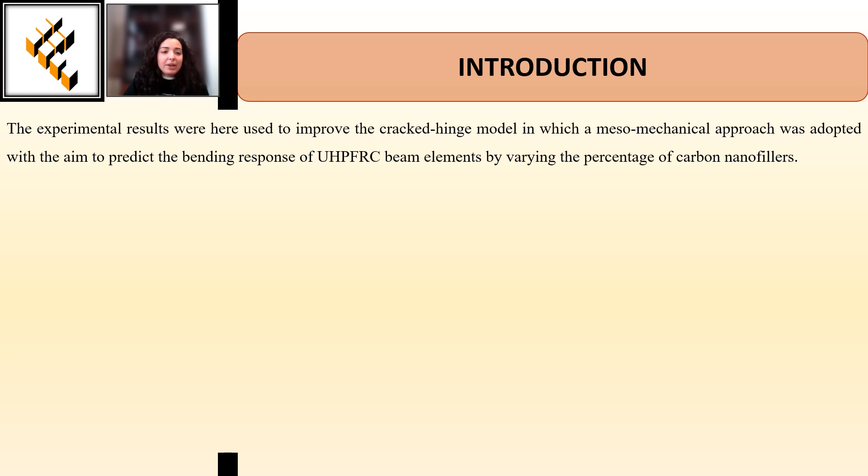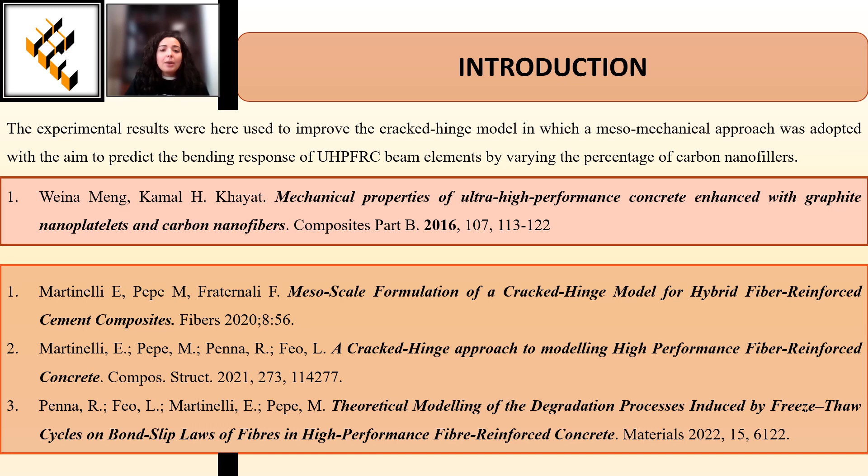First of all, the experimental results were those presented in this work by Meng and Khayat, and were used here to improve the Cracked-Hinge model already developed in this work, in which a mesomechanical approach was adopted. The aim is to predict the response of ultra-high performance fiber reinforced concrete beam elements by varying the percentage of carbon nanofiller.

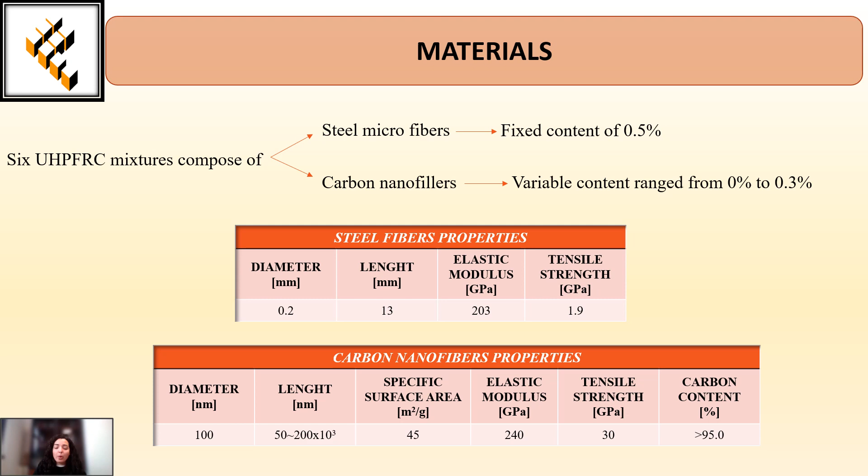As regards the material, six mixtures composed of steel microfibers with a fixed content of 0.5% and carbon nanofillers with a variable content ranging from 0 to 0.3% were considered.

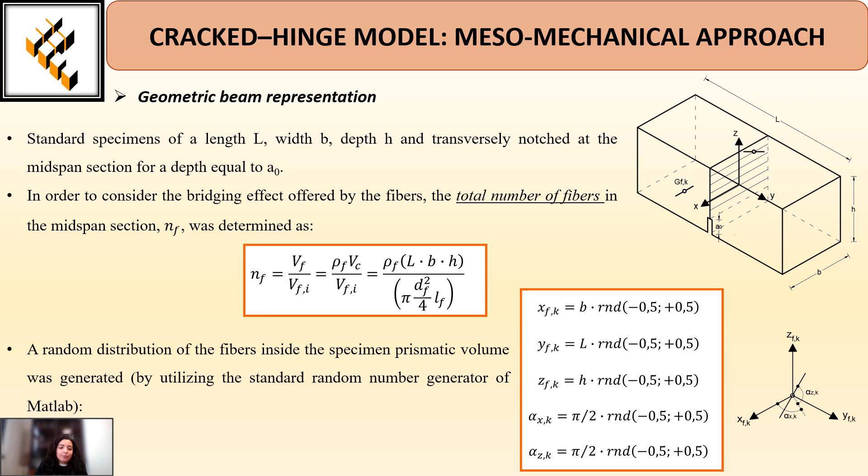For the geometric beam representation, a standard specimen transversely notched at the mid-span section was considered. The model is able to consider the bridging effect offered by the fibers, so the total number of fibers in the mid-span section was determined as the ratio between the volume of the total fibers and the volume of the single fiber. A random distribution of the fibers inside the specimen's prismatic volume was generated by utilizing the standard random number generator in MATLAB.

As regards the model, the principle of the kinematics is inspired by the so-called Cracked-Hinge approach, based on the following assumptions. First, the flexibility was distributed only in the center part of the specimen, while a rigid body behavior is exhibited by the remaining end parts.

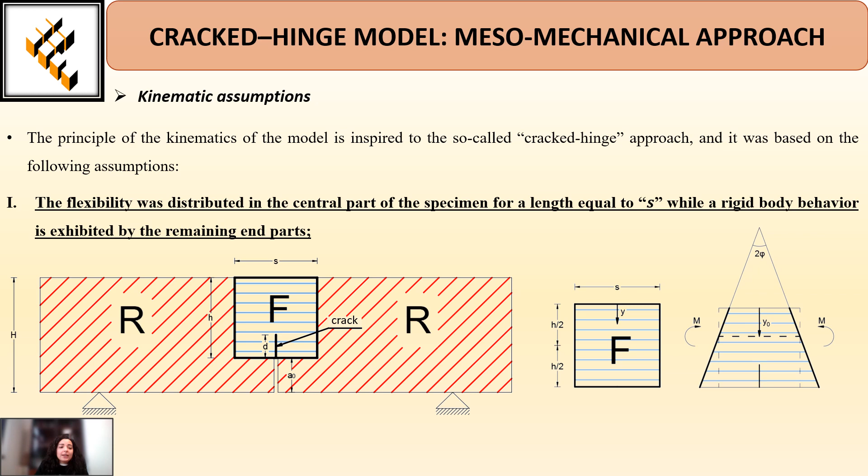Then, if we discretize the mid-span section into NC layers, we can evaluate the average axial strain of the Kth layer before crack formation and the crack opening displacement after crack formation. This means the average value of the axial stress of the concrete at the Kth strip can be determined as a function of the axial deformation before cracking, or as a function of the crack opening displacement after cracking.

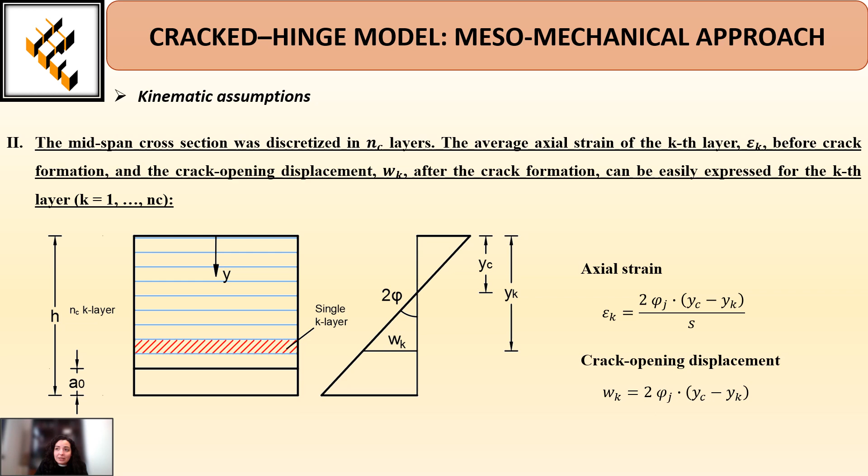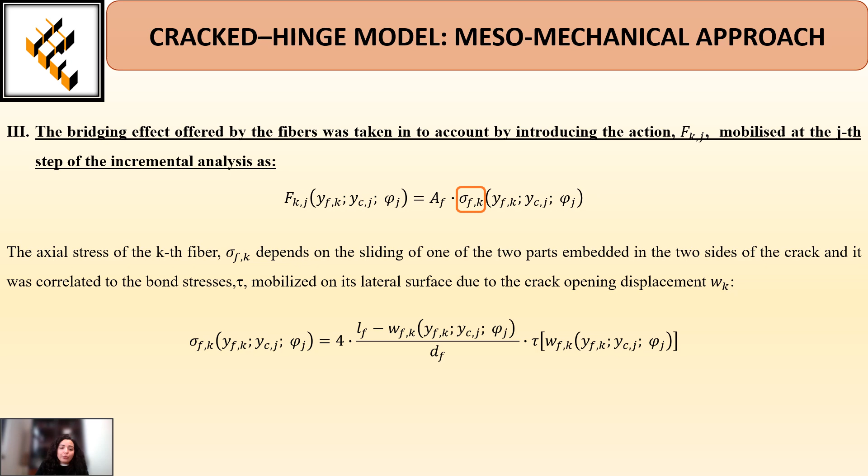As regards the fibers, the bridging effect offered by the fibers was taken into account by introducing the action Fk mobilized at the Jth step of the incremental analysis as the product between the fiber's area and the axial stress that depends on the sliding of the two parts embedded on the two sides of the crack, correlated to the bond stresses but also to the crack opening displacement.

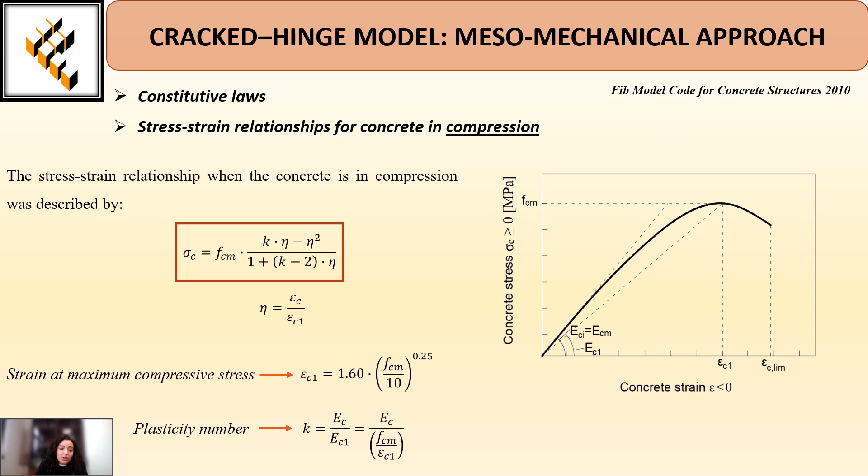For the constitutive law, we refer to the Fib model code for concrete structures. The concrete behavior in compression is described by this equation, related to the strain at the maximum compressive stress and the plasticity number.

To describe the tensile behavior, a stress-strain diagram should be used for the uncracked concrete, and a stress crack opening diagram, as shown in this second figure, should be used for the cracked section.

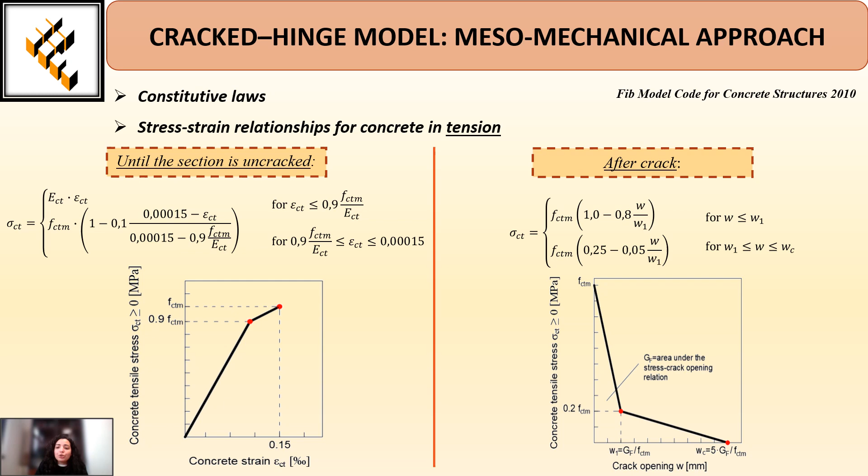As regards the constitutive law for the short steel fibers, the mathematical relation of the local constitutive law adopted in this study is provided in this equation, where S was considered equal to the crack opening displacement at the level of the Kth fiber, while the 5 unknown parameters have to be calibrated using the experimental data.

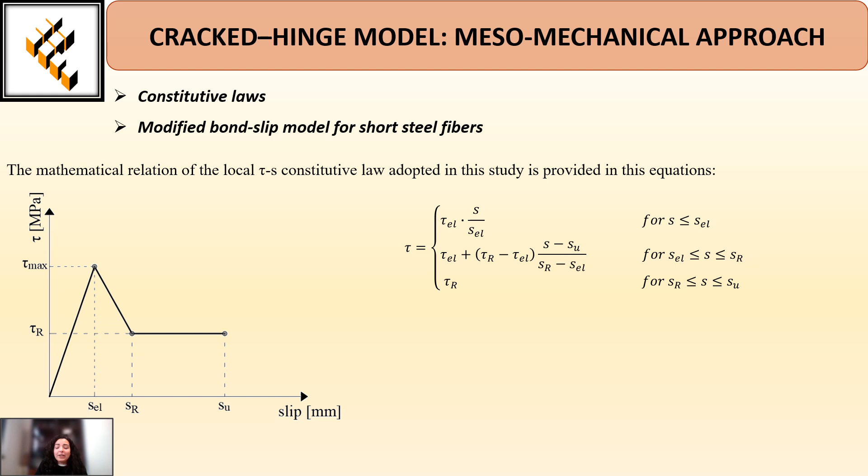The nonlinear bond-slip law is divided into 3 different branches: a linear elastic behavior at the stress level corresponding to the matrix tensile strength, a softening behavior characterized by the formation of many microcracks in the mixture, and a constant behavior.

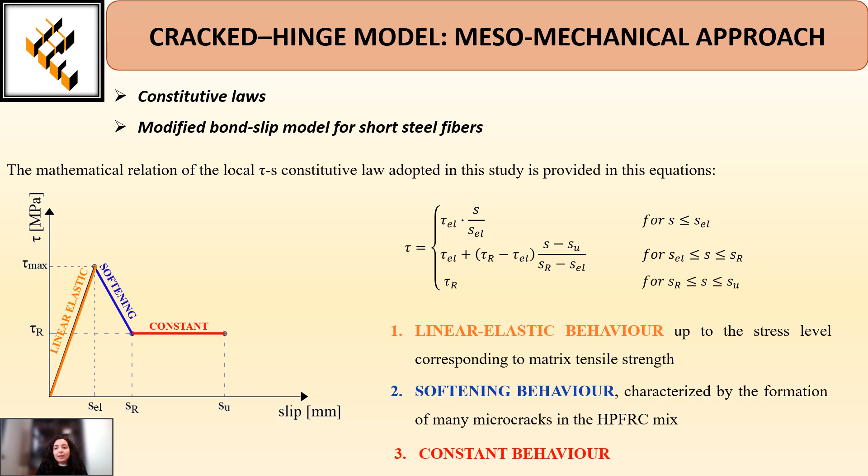For the calibration, an inverse identification procedure was carried out with the aim to determine the value of the model parameters that lead to minimizing the difference between the measured and predicted force displacement curves.

The increase in the fracture energy with the increase in the percentage of nanofiller was taken into account by modifying not only the crack opening W1 through the alpha parameters, but also the fracture energy through the initial fracture energy and the initial compressive strength.

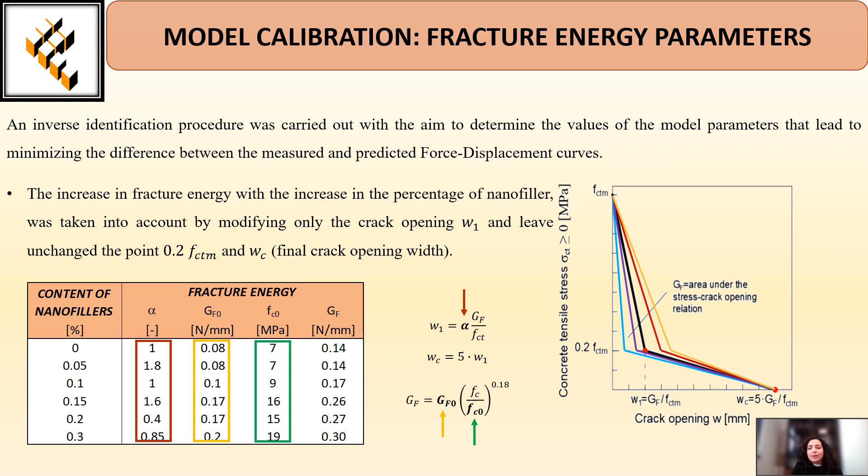For the calibration of the bond-slip law parameters, first 5 parameters were calibrated for the specimen without nanofiller, and then the 2 bond stresses were calibrated again for reinforced specimens, while all the other parameters were considered constant. Here it's possible to see better the initial branches.

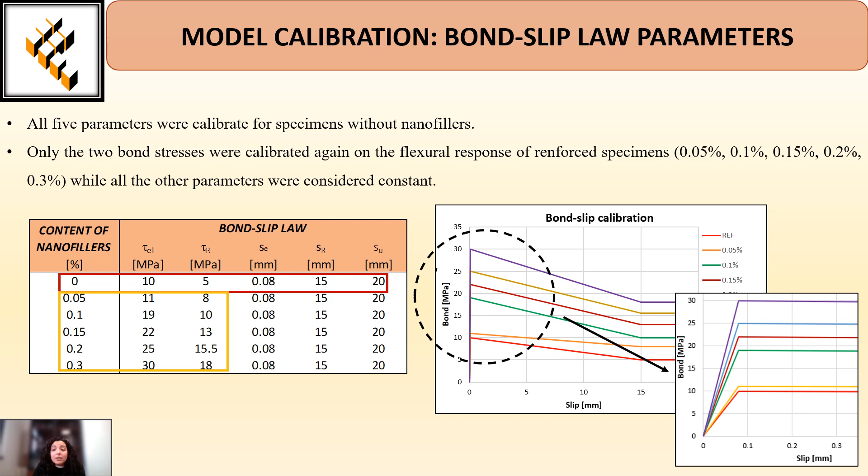In this slide are presented the results, so the comparison between the numerical load deflection curves, which are the colored ones, and the experimental curves, which are the black ones. We can see that the curves match almost perfectly in the first part, while some differences are presented in the post-crack behavior.

A softening behavior is exhibited for low content of nanofillers, and a hardening behavior is observed when the content is higher than 0.1%.

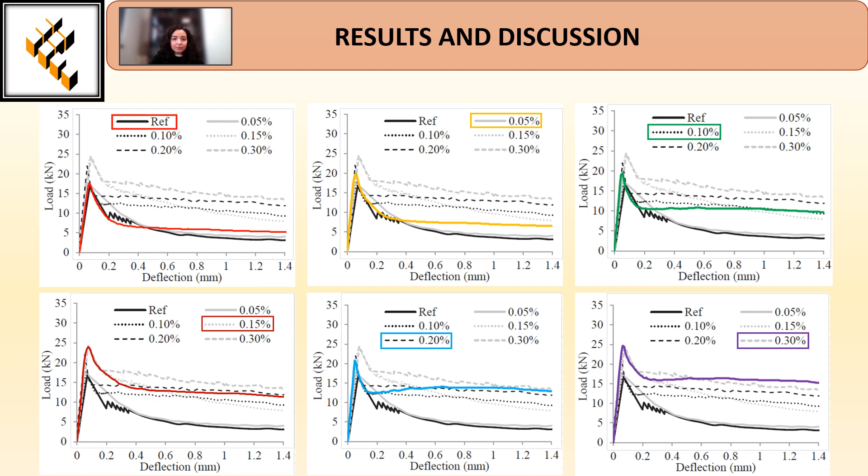It can be noted that the correlation of the stress-strain behavior in terms of fracture energy results in an almost linear correlation with the increase in nanofiller content.

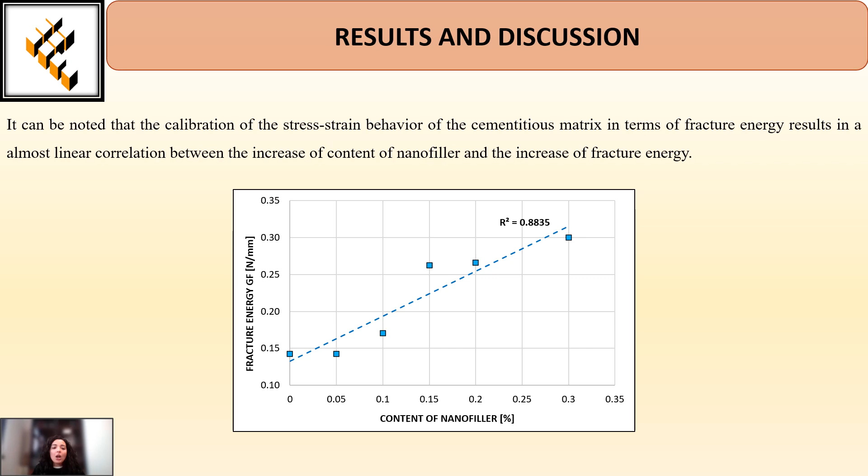At the same time, the back analysis of the bond interaction between the cementitious matrix and the steel fiber shows that the increase of nanofiller dosage is linearly correlated to the increment of bond stresses.

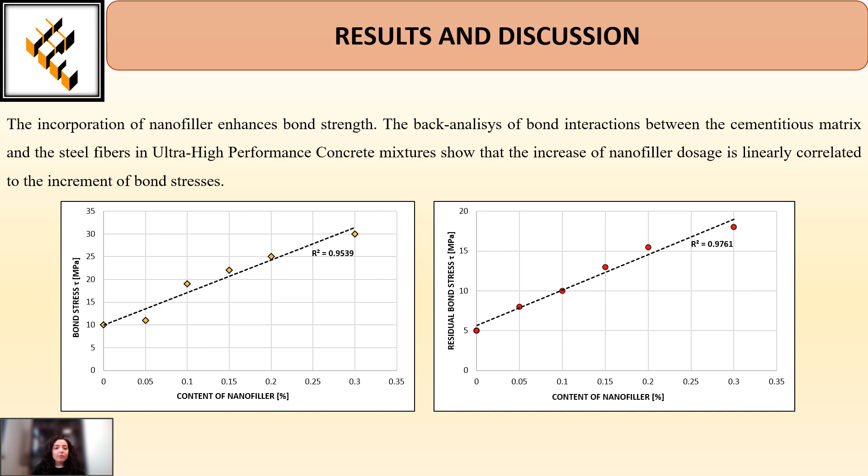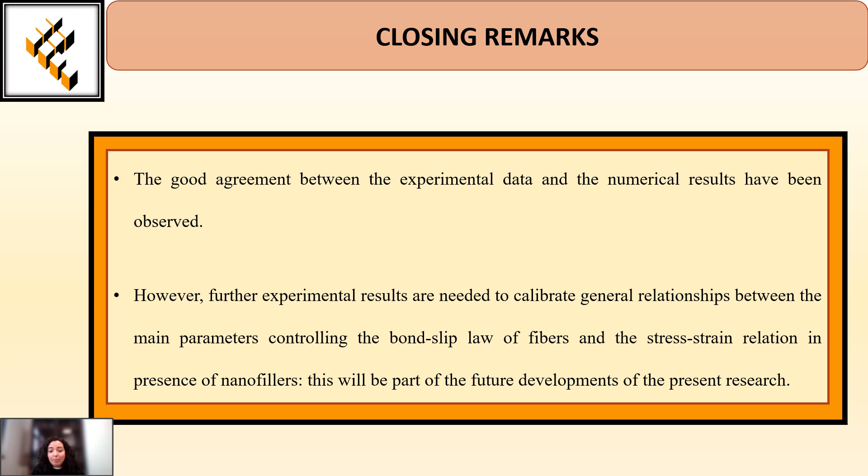In the end, good agreement between the experimental data and the numerical results has been observed. However, future experimental results are needed to calibrate a general relationship between the main parameters that control the bond-slip law of the fibers and the stress-strain relation in presence of nanofiller. This will be part of future developments of the present research.